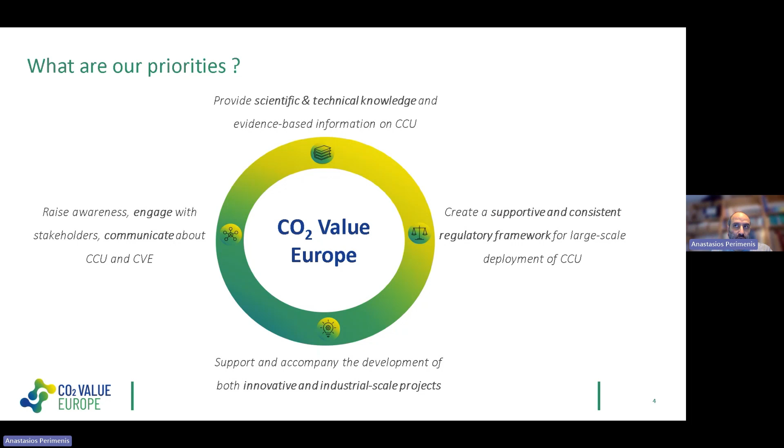Not everybody knows what CCU is, and there are also a lot of misconceptions about CCU, CCS, CCUS, CDR. All those terms sometimes are being used in a confusing manner. So we communicate about the subject, about us, about what our members are doing on that, so that we can raise awareness about the subject and its merits.

So what is CCU? I won't go into much detail on that, but basically it's a circular process where carbon dioxide is captured and this carbon can be used in a product. We follow the definition of the IPCC, and this conversion can take place under many technologies. It could be thermochemical, electrochemical, biological, and you have a wide spectrum of products that can be produced from those technologies. And at the end of life, the CO2 will either be permanently bound, or it will come out again and it can be captured and continue this circle again.

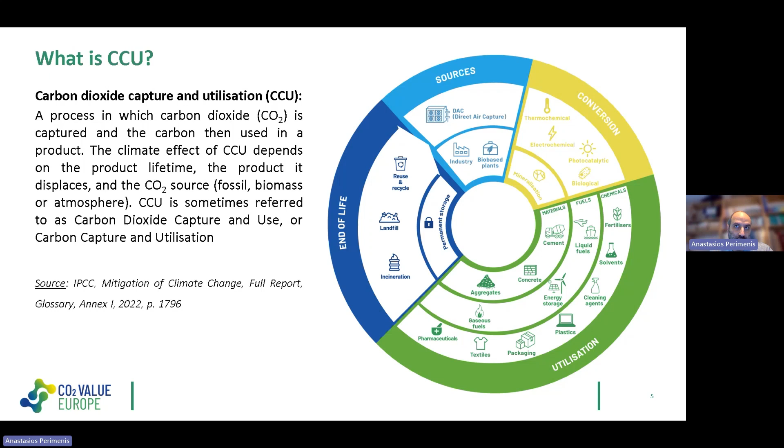So the basic reasons why CCU is important, among others, but importantly, these are arrays of processes that can lead to emission reductions, that can lead to net zero processes and pathways, and can even lead to carbon removal, so negative emissions. And that depends on what kind of product you will use and where your CO2 is coming from.

Importantly, and something that is often neglected in the discussion, is that CCU is not only a climate mitigation option. It's not only there to treat emissions, but it's also there to bring an alternative carbon feedstock into the production system. We don't have a lot of possibilities to substitute fossil carbon. There's biomass with its physical constraints. You can recycle a lot, chemical and mechanical recycling. And then you have CO2, which is a scalable alternative carbon source. And that brings more circularity into the production system.

If I can give an example, focusing on the fuel part, you would have an initial CO2 emitter, let's say a cement factory, and that would emit CO2, and then you would have your transport sector that will also consume fossil resources and would also emit CO2. If you want to claim emission reductions, then you can take the CO2 from the cement factory, for example, convert it into a fuel, and thereby substitute fossil fuel for the transport sector. And by this substitution, you can claim emission reductions.

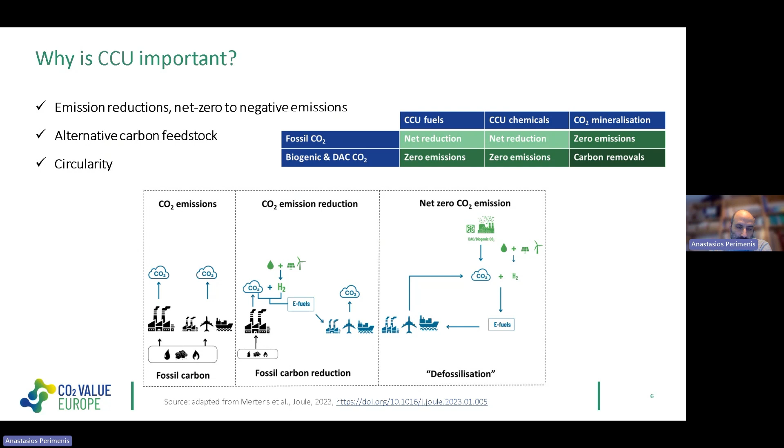And if you keep on recapturing this CO2 after its emission and bringing it back into the system, reproducing CCU fuels, or e-fuels as we call them, and use them in a continuous loop, then you are leading to net zero pathways. Or if you are taking this CO2 from the atmosphere, from the air, or from biogenic CO2, and you produce e-fuel, then you're also contributing to net zero pathways. So these are some examples of the importance of CCU.

And recently, in February last year, we tried to quantify this contribution of CCU towards climate neutrality, towards net zero by 2050, and to answer some questions like how much CO2 are we going to need to capture, how much of it will go to use, how much will go to storage, which economic sectors will see most of the reductions, how much electricity will we need to do that, where is the CO2 coming from. All these are in the report that we published last year. If I did my work correctly, then the barcode should function normally.

But the main message from this report, and here it's a simplified illustration so that it is more visible, is that looking at the graph from left to right, the blue column is the emissions of 2019 as a reference point, and under stated policies, we would be able to reduce 1/3 of those emissions by 2050. That's the second column, which means that we need around 2/3 of further effort. And we modeled this further effort, and we developed scenarios of this further effort where CCU is a part.

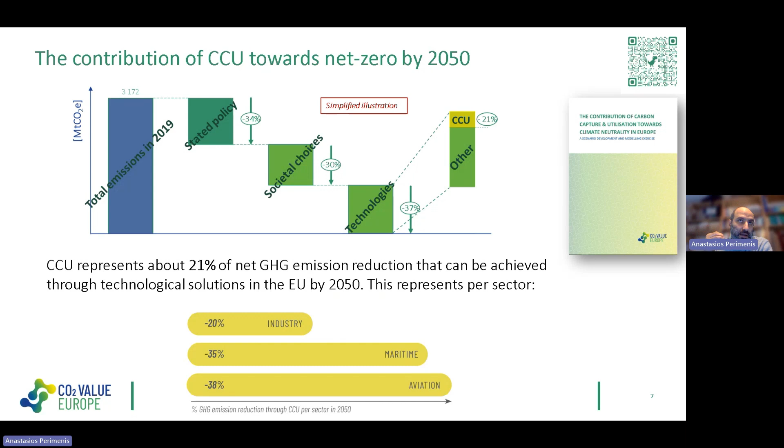And we saw that another 1/3 of what we need would come from societal choices that we have to make as a society overall to reach climate neutrality. And the last 1/3 would come from technological choices, from the technological effort that can take place. And of that technological effort, CCU would correspond to 20%. So overall, around 8% of the emission reductions that we need until climate neutrality would come from CCU by 2050.

And this is something that is happening already. So it's not something of the future. Here we see a list from our database, a list of projects that are expected to become operational by 2030. So in 5 years' time, in different areas, and the list is not exhaustive, but in different areas at different capacities for different products.

And that shows that there is a momentum of creating projects at industrial scale. And we need to foster and to keep this momentum going, because these products will substitute the conventional fossil-related products and will bring more circularity into our production systems.

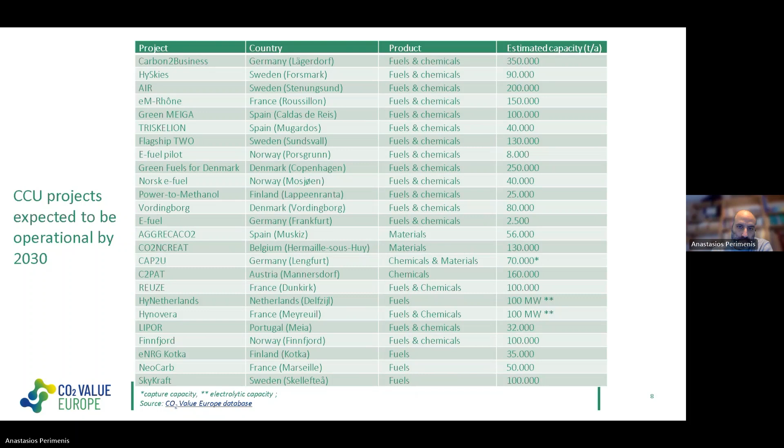And to make these projects happen, like every other innovative clean tech solution, it needs support. It needs funding and financing support. Here I'm showing 2 examples where CCU is relevant and has been supported. The Innovation Fund, which is probably the largest clean tech fund, also globally, I would say, with around 40 billion euros financed from the emission trading scheme until 2030.

And so far, at least 14 projects with a CCU element were supported during the first 3 calls. And this is an instrument that is evolving. It includes different scales. It started with large and small scale. Now it also has a medium scale. It supports different financing instruments like the hydrogen auction for the last call, and this one, the one of this year.

It has sector-specific support, for example, for the marine industry. So CCU is eligible, and we encourage our members and our stakeholders to profit from this. We also have Horizon Europe, the successor of Horizon 2020, which is the main R&D framework program from the Commission.

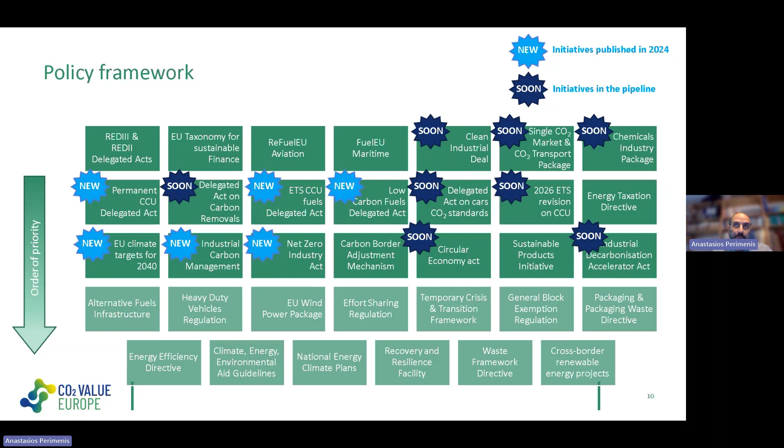So all of those instruments are relevant. Some are more generic about industrial carbon overall, and some are more topical about a specific sector, aviation, maritime. In the next slide, we can see a couple of examples. This is with the view of you having this presentation, and you can look at it at your ease afterwards.

But if you look at the ETS, the emission trading scheme revision, where basically with the ETS you have to pay for allowances to be able to emit, it has been recently recognized with the revision of the ETS that when you bind this CO2 in a permanent way into a product through mineralization, for example, you don't have to surrender your allowances because the CO2 is not coming into the atmosphere again.

As we speak, there is a discussion of how you can incorporate those uses and applications of CCU that are not of permanent binding, like fuels or chemicals, where the CO2 is eventually, at the end of life, coming out again, but it has substituted a fossil conventional counter product. And this is a discussion that is happening now.

If you look at ReFuelEU Aviation, the third in the list, for example, there you have quotas for sustainable aviation fuels. And by quotas, we mean that the fuel supplier and the airlines are obliged to use X% of sustainable aviation fuel. And there is a subcategory for synthetic aviation fuel, which is basically CCU fuels.

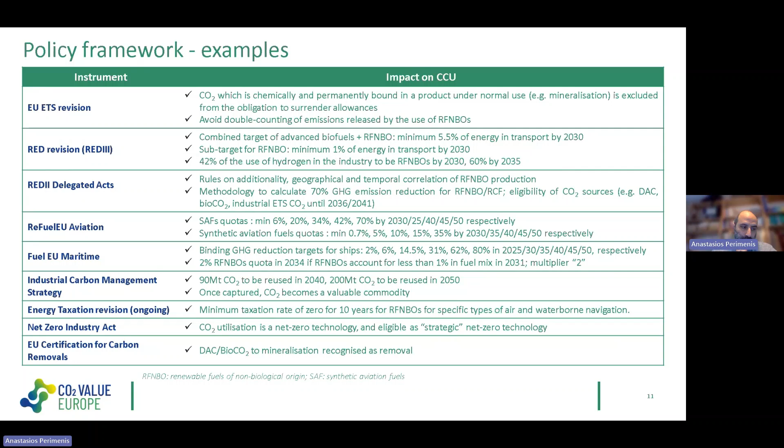To sum it up, because I think I have a couple of minutes left. What we have calculated with our work that I mentioned before, and it's not very far from what the Commission says in its impact assessment for the 2040 targets and in the Industrial Carbon Management Strategy, is that CCU can represent around 45% of the carbon that we will need to capture in Europe. That will be around 450 megatons. And that can be used for the production of fuels, chemicals, and materials to defossilize various economic sectors in Europe.

We have several projects, as we have shown, that are able to become operational, but they need a policy framework that is consistent, that is pragmatic, so considerate of the industrial realities, and, especially at the beginning, not overly strict on how you can access your renewable electricity or what kind of CO2 you will be able to use and until when. So that is very important for projects that are ongoing now, and we have also seen some projects being stopped because of these regulatory framework difficulties.

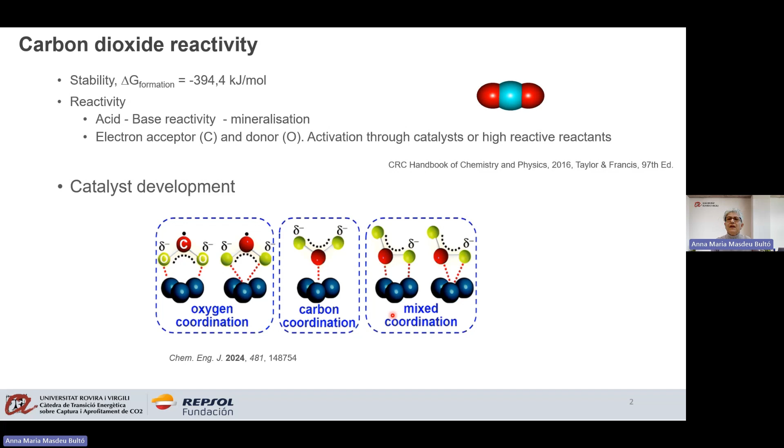Then the catalyst development at this point is crucial for CO2 transformation. And the capture technologies implemented so far are mostly related to the acid-base character, in this acid-base reaction, mostly with alkanolamines. But this process has some drawbacks due to the need of energy to separate the CO2.

Then, among other issues, new processes to avoid the issues have to be developed, and the use of porous adsorbents for physical and chemical adsorption is one of these possibilities, and materials such as zeolites, porous carbon, and more recently metal organic frameworks have shown high CO2 adsorption capacity.

MOFs are metal-containing porous polymers consisting of metal coordinated to ligands, which are interconnected between them to form one, two or three dimensional structures leaving pores where CO2 can be adsorbed. These materials are not only applied to capture, but since they may contain active metal centers, which is the case of this magnesium example here, they are also explored in connected capture and reactivity technologies, the so-called reactive carbon capture.

But the transformation to carbonate-based materials can be a way to reuse CO2, not only to get rid of it, but to prepare useful materials such as aggregate for building materials. And when CO2 comes from direct air capture, for example, it could contribute to negative emissions. A joint project of Repsol, Petronor, and Ausio has developed this construction and will be presented by Peter Guni.

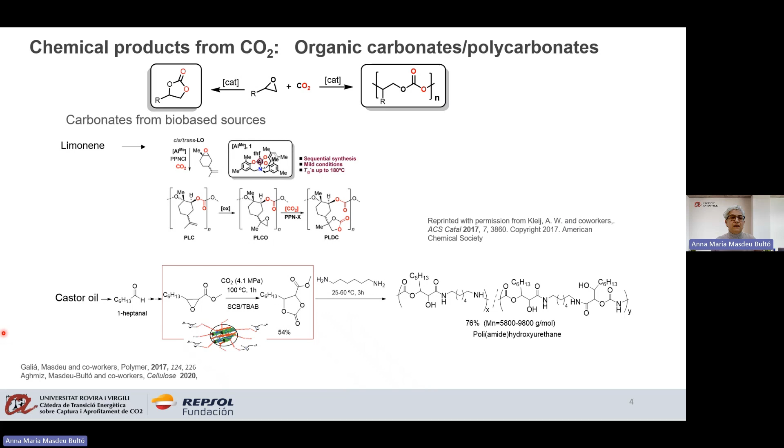developed in our group in collaboration with Professor Galia from our university and Professor Aghmiz from Tetuan University. In this case, a derivative from castor oil was transformed to an oxide, and using a catalyst obtained from vegetal waste, it was transformed by reaction with CO2 into a cyclic carbonate. It reacted readily with a diamine to form this polyurethane that can be used as a polymer. So these are a couple of examples of alternatives that are being developed.

And regarding other products such as methanol, methane, fuels, or carbon monoxide, they can be obtained from reduction of CO2 using hydrogen, and they can be used as fuels directly. Methanol or methane have the advantage that the emissions of CO2 are less important, but they can also be used as chemical intermediates for products. For example, the production of methanol by the ICI process is an established process using aluminium, zinc, and copper-based catalysts.

And now in this area, the research is focusing on the use of multifunctional catalysts that can transform CO2 to fuels directly with the same catalyst. And another important aspect is the transformation of CO2 to what they call e-fuels. For that, the first reaction is to convert CO2 by reaction with hydrogen to CO, a mixture of CO and hydrogen, syngas, and then by the Fischer-Tropsch reaction, this syngas can be converted to e-fuels, and this topic will be presented by Diana Cano.

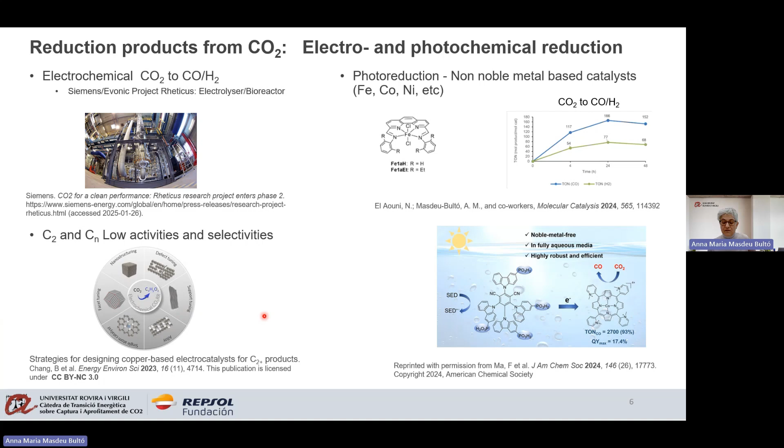And the strategies are important, the strategies of tuning the design of the catalyst. For example, they have been using nanostructures. They have been tuning the defects of this structure, or the support is important. They have been using alloys with different metals to promote the reduction and the coupling, and also single atom catalysts. So as a conclusion, there are multiple scientific and technological challenges to be faced to develop the potential of CO2 transformation.

And just a last idea, there is no research without the support of society that allows or fosters the investment coming from public or private resources. So the chair is very much involved in dissemination of the decarbonization subject through local media and participating in side events. And also, in that sense, the University Rovira i Virgili is organizing a Master on Industrial Society Decarbonization Management. We will hopefully start next academic year and it will cover the multidisciplinary complexity of decarbonization.

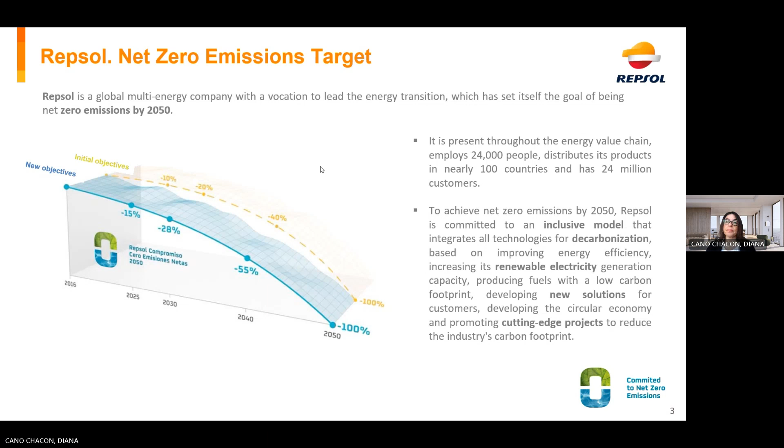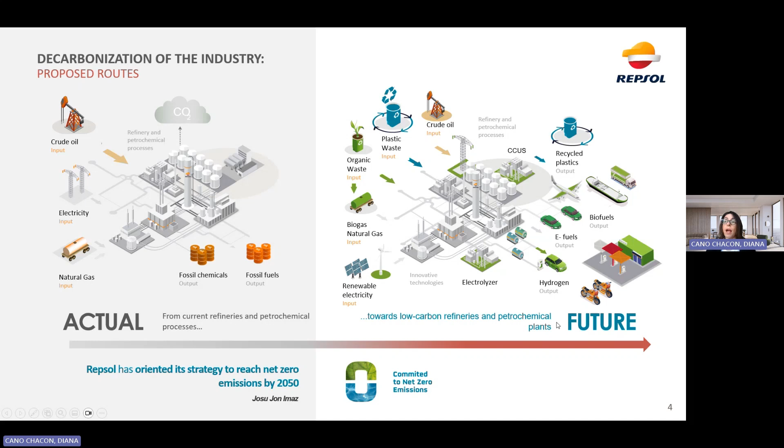Repsol is a global multi-energy Spanish company with a vocation in the energy transition. Repsol was the first company in the industry to announce its net zero emissions by 2050. But how? Repsol defends technological neutrality. To achieve this goal, we adapt the current model of refineries and petrochemical processes to low carbon plants. Replace the use of conventional crude oil, electricity, natural gas, with renewable resources, waste and biogas. Conventional products like fuels and chemicals will be replaced by renewable products like recycled plastics, hydrogen, and renewable fuels, both biofuels and synthetic.

Okay, then let's start to explain what e-fuels are and the role that they will play in the decarbonization of transport. E-fuel is a term used to describe synthetic hydrocarbons resulting from the combination of renewable hydrogen and CO2 coming from a concentrated source or directly from the air. E-fuels are also named RFNBO, renewable fuels of non-biological origin. You can also name them power to liquid, synthetic blending components, etc.

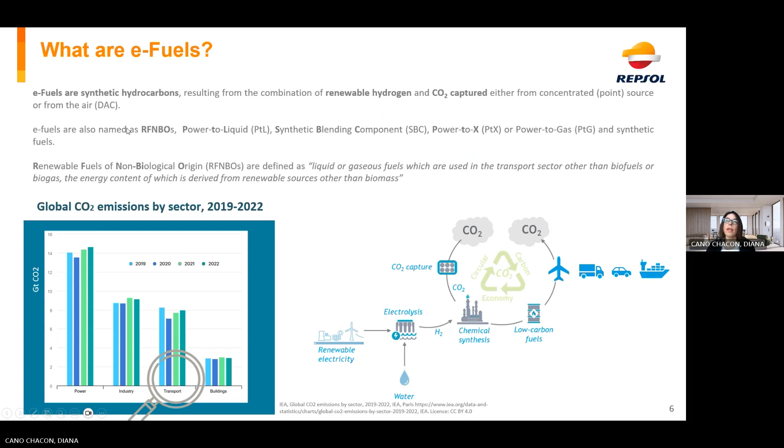Let's go into the detail of the production pathways. E-fuel production starts with the renewable hydrogen production. This is done by an electrolysis process that breaks down water into its components, hydrogen and oxygen. Renewable electricity is required. The second feedstock needed is CO2, captured either directly from the air or from an industrial source, which can be biogenic or fossil.

The regulation establishes that non-sustainable CO2 will be banned from 2041. Basically, that means that in the future they will have to be produced from biogenic CO2, and this is an important challenge. In the first process step, the hydrogen is combined with CO2 under pressure and temperature using catalysts, either directly through the methanol route or with syngas through the Fischer-Tropsch pathway.

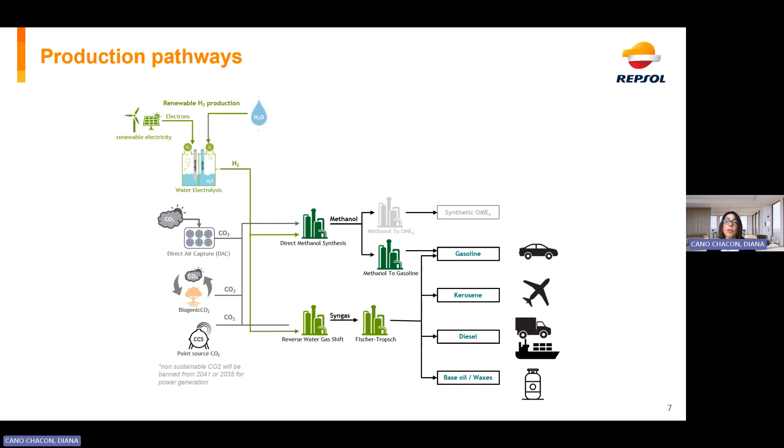In the methanol route, a second step is needed to transform the methanol, the alcohol, into paraffins in different steps to produce the final products, e-gasoline and e-kerosene. In the other route, the Fischer-Tropsch route, the hydrogen reacts with CO2 and forms the syngas, carbon monoxide and hydrogen, and then it reacts in the Fischer-Tropsch, a well-known catalytic process in which the syngas is converted into liquid hydrocarbons or synthetic crude. This synthetic crude is upgraded until the final product.

The context: how is the regulation in Europe? E-fuels are not specifically defined by regulation, but they are included in the RFNBO definition. The European Commission is reviewing to recognize light-duty vehicles that are fueled exclusively with e-fuels. Heavy-duty regulation is under discussion and will be impacted by the light-duty vehicles regulation.

Along the Fit for 55 package, there are specific mandates for e-fuels, for RFNBOs, in all transport modes. We have different targets in ReFuelEU Aviation, in FuelEU Maritime, and also in the Renewable Energy Directive, RED 3, for all transport modes. So clarity in regulation is very important in order to be able to carry out investments for the private and public sector.

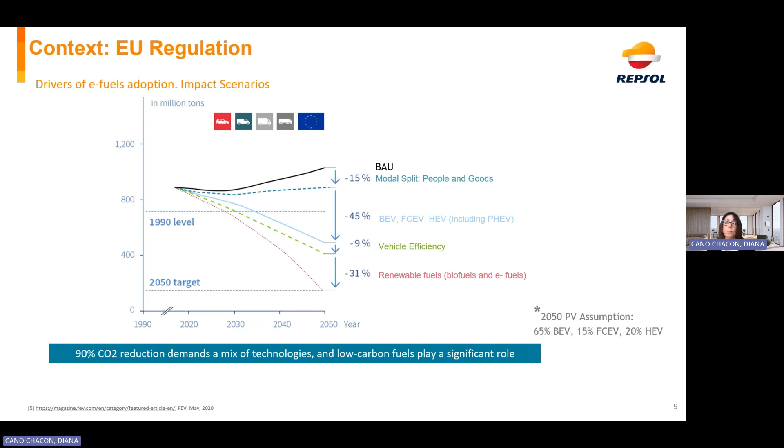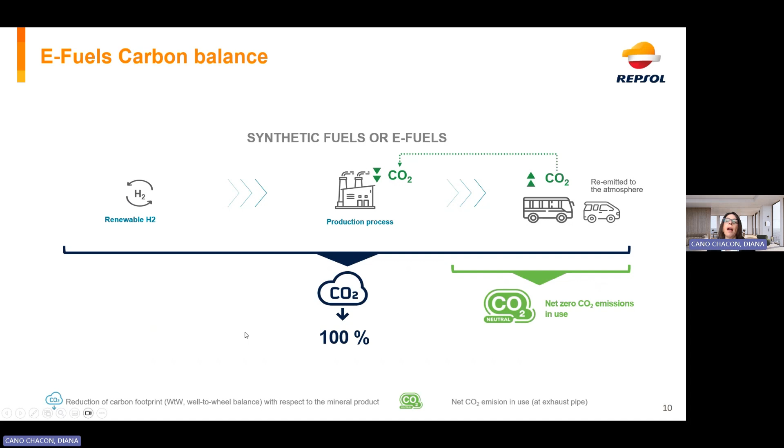If we talk about the carbon balance in e-fuels, we see here that in the production process, the CO2 that is captured to produce the e-fuel is equivalent to the one that is emitted to the atmosphere. That is what we call net zero CO2 emissions in use. We are talking about the exhaust. If we talk about the well-to-wheel balance compared to fossil, conventional fuels, we have a very important CO2 footprint reduction with e-fuels.

Then, to summarize, why e-fuels? Because they are net zero emissions, because they are compatible with existing infrastructure and fleet. They are a solution for a wide range of sectors: aviation, road, and marine. They are practically unlimited, because we have available CO2, renewable electricity, and water, which are the raw materials. They are an alternative for non-fuel products like lubricants, chemical industry, or waxes, and they are a renewable energy vector.

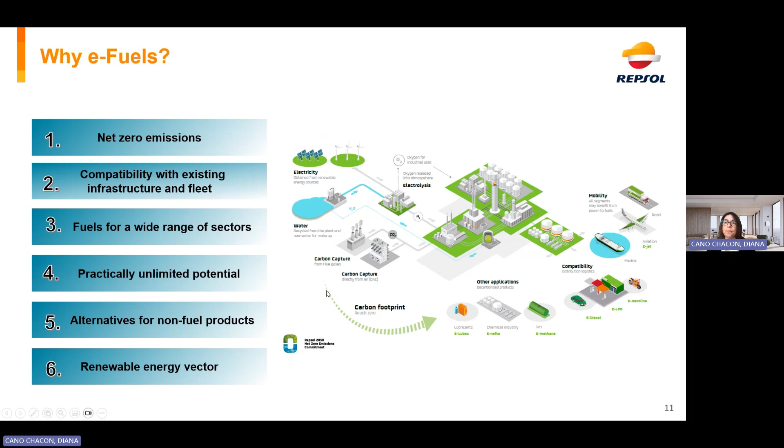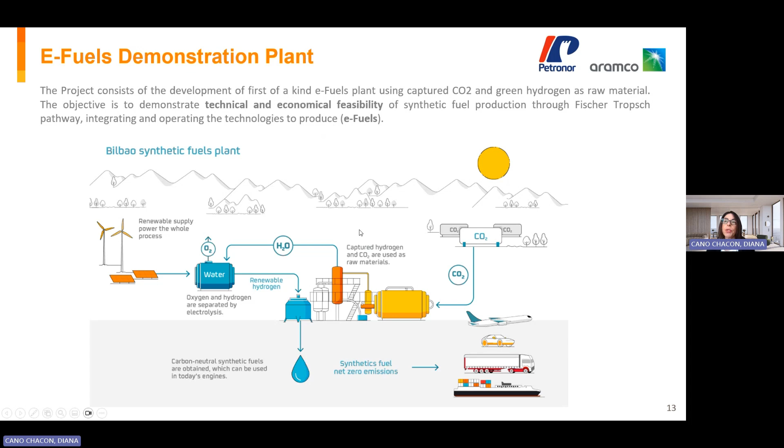Let's go into the explanation of the project that Repsol is currently developing. The project consists of a first-of-a-kind demonstration plant that will use captured CO2 and renewable hydrogen as raw material. The objective is to demonstrate the technical and economic feasibility of synthetic fuel production through the Fischer-Tropsch pathway, integrating and operating the technologies that we are going to use to produce the e-fuels.

If we go into the project details, the demonstration plant will be located in Bilbao. The startup is during 2026. The production capacity is around 2,000 tons per year of e-fuels. The CO2 avoidance is around 7,000 tons per year. The demonstration plant will use green hydrogen from a 10 megawatt electrolyzer located in the same place. The objective, as I explained before, is to demonstrate the technical and economic feasibility of e-fuels production through Fischer-Tropsch. Some key insights of the project.

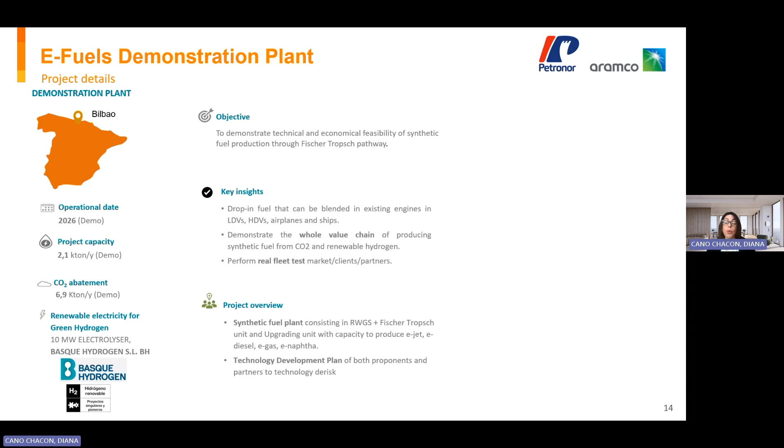We will produce drop-in fuels that can be blended in existing engines. We will demonstrate the whole value chain of producing synthetic fuels, and we will perform real fleet tests in market with clients and partners. So the project consists of a demo plant composed of 3 different units: reverse water gas shift to produce the syngas, the Fischer-Tropsch process to produce the synthetic crude, and finally the upgrading unit that will produce the final products: e-naphtha, e-kerosene, and e-diesel.

We have a technological plan to de-risk the technology. About the partnerships for e-fuels production: the partners, the investors, are Saudi Aramco and Repsol, 50% each. Petronor is an important part of the project as it provides integration with the refinery that is very close to the demonstration plant. We have 2 technology partners, Johnson Matthey and Axens.

And last but not least, we have a partnership with Basque Hydrogen, that is the company that has been created to build the 10 megawatt electrolyzer. And the shareholders are Alba, that is an affiliate of Repsol Petronor, Enagas Renovable, and the Basque Energy Agency.

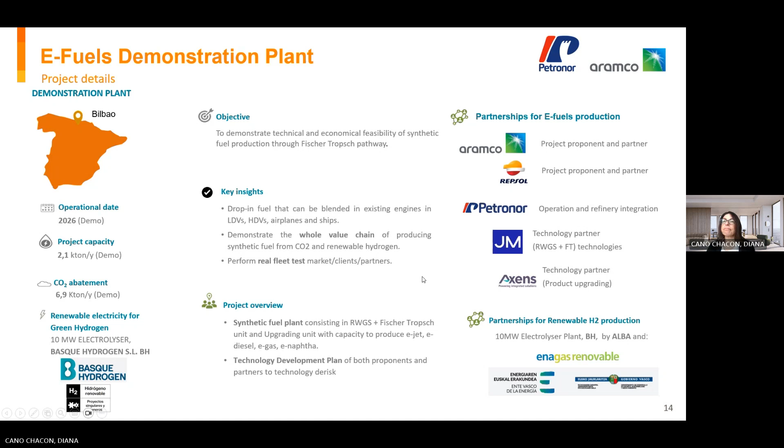The CO2 is currently captured in an industrial plant in the refinery. We have future plans to replace this CO2 with DAC, with CO2 captured from the air. And the hydrogen from the demo will be connected with the refinery with a reversible line that can provide hydrogen to the demo in the case of any electrolyzer failure.

The next step will be the scaling up of e-fuel production. We need to face some challenges, and on the other hand, we have new opportunities. Regarding the challenges, we have business challenges. The first one, and very important, is that the cost and investment necessary for producing fuels is very high. Also, the regulatory framework is very demanding. We have an obligation of synthetic fuel in the transport sector. We have some restrictions for the CO2 source origin.

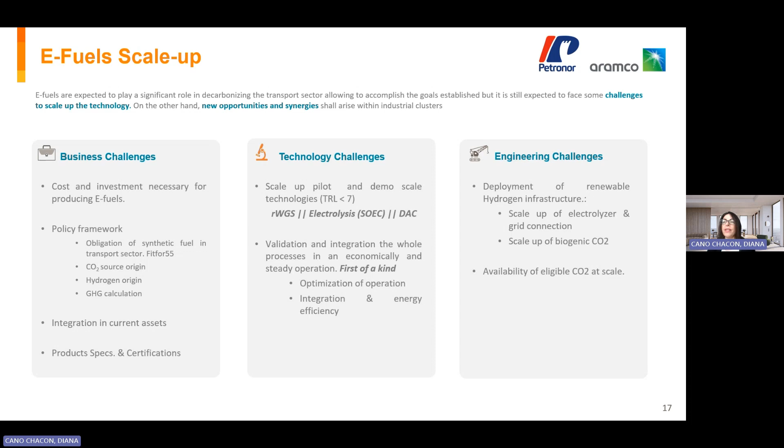For that, we need to validate and integrate the whole processes in an economical and steady operation. We need to optimize the operation, and we need to improve the energy efficiency of the project. The engineering challenges are regarding the hydrogen infrastructure. We need to scale up the electrolyzer and the grid connection, and we need to cope with the availability of eligible CO2 at scale.

Finally, the direct opportunities that we are facing: the ReFuelEU Aviation legislation sets a minimum synthetic fuel share in kerosene blended fuel from 2030 up to 2050. This is a clear mandate that increases over time. It's an opportunity. Also, this production pathway produces high quality streams with a high energy density, and it increases the flexibility for final products.

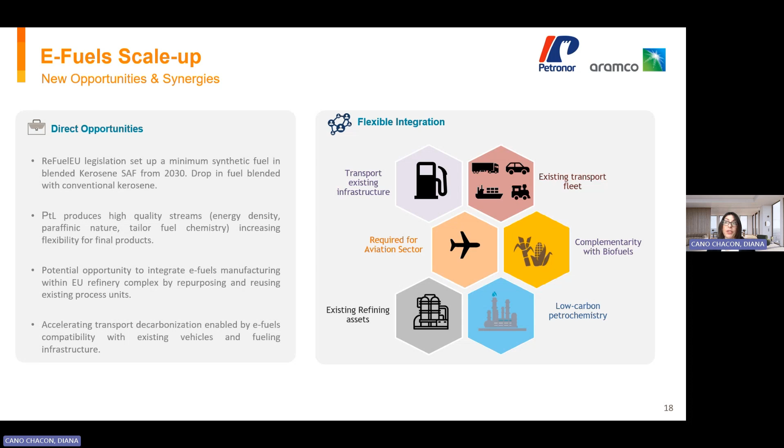We have a potential opportunity to integrate this new process in a refinery by reusing or retrofitting existing process units. We can accelerate transport decarbonization because e-fuels are fully compatible with existing vehicles and fueling infrastructure. So to summarize, if we want to achieve net zero emissions in the future, we need to combine different technologies.

Synthetic fuels are renewable fuels that will play an important role in sectors that are difficult to electrify, like aviation and maritime. They also have the advantage of being able to accelerate transport decarbonization because they are fully compatible with existing infrastructure. The challenge ahead is technology development with funding, financial, institutional, and social support to reduce the costs of this pathway. Thank you very much.

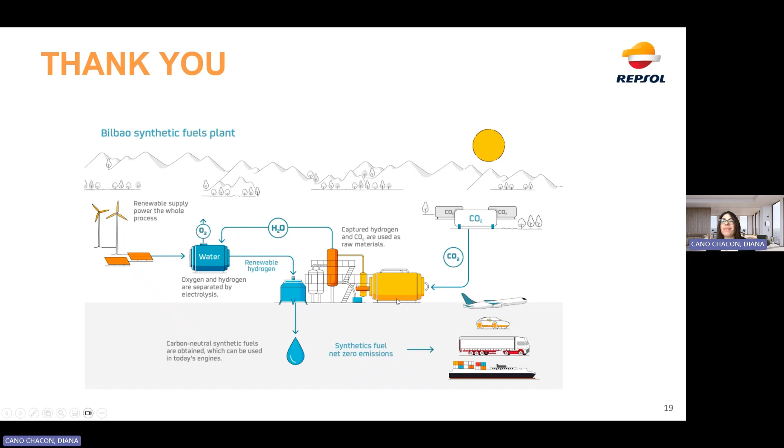Thank you, Diana Cano, for sharing with us this project of Repsol. Now, let's go. We are about 6 minutes delayed.

So now let's move towards the next speaker, Francisco Pelayo Garcia. He is a professor and group leader at the Institute of Photonic Sciences in Barcelona. His research spans the design and engineering of materials and systems for applications in clean energy, and focuses on developing scalable and sustainable technologies to produce chemicals, including green hydrogen and hydrocarbons from carbon dioxide capture and conversion. Please, Francisco Pelayo, the floor is yours.

Thank you, Anna. Let me share my screen. And well, thank you.

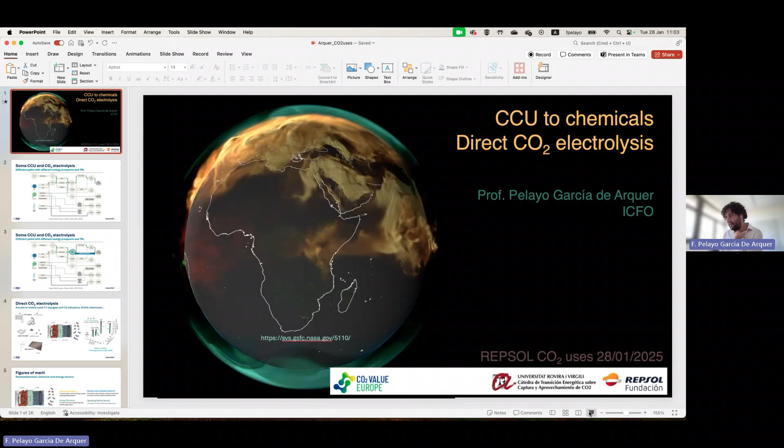Well, again, for the introduction. I'll try to be brief so we cut down the 6-minute losses in time that we accumulate. Okay, so I don't know if you can see the screen. I like normally to start with this brief animation.

I don't have time to explain in detail, but I think this is a beautiful animation from NASA showing biogenic sources of CO2 in green and anthropogenic sources of CO2 in orange-brown. And you could look into this here in more detail. But today I'll try to summarize and explain, first, in more detail what CO2 direct electrolysis is and how this falls within the overall portfolio of technologies for carbon capture and utilization.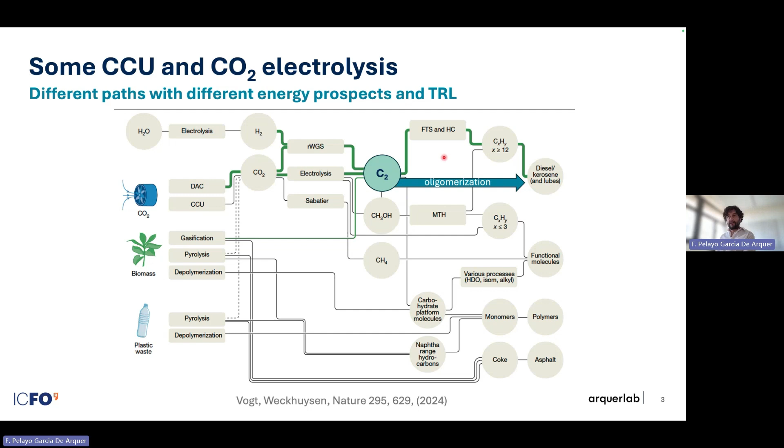So I explain a bit more now about the core of this technology. In direct CO2 electrolysis, you need a carbon source. This could be from the atmosphere, like DAC, or from single point emitters, like steel factories or cement factories. You need water, of course, and you also need electricity. And one of the appeals of this technology is that, as opposed to Fischer-Tropsch and others, this can be directly operated with electricity, so it doesn't need high temperatures or pressure. So it can be coupled with renewables in a convenient way.

So you have a cathode, and the idea is that you have to break down the CO2 molecules into fragments, normally CO fragments first, and you also have to break down the water into smaller fragments, like OH groups, and you need to couple these on top of the cathode catalyst electrode. You also have an anode to close the reaction, where you normally oxidize water, and a membrane that separates these processes. In doing so, you have access to a wide range of small carbon-based molecules.

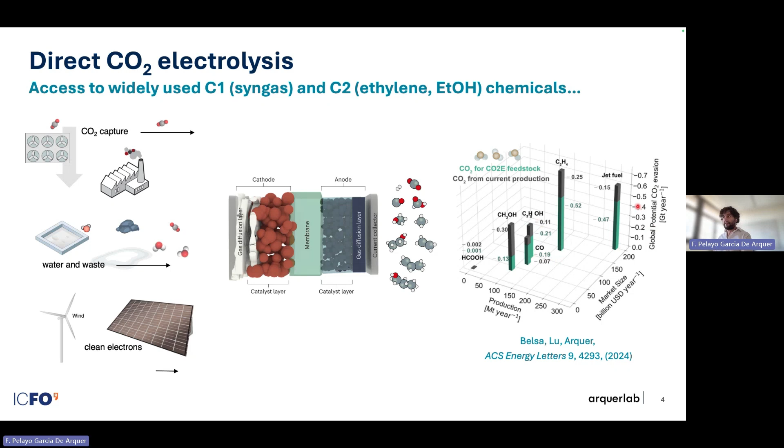So you can see here already ethylene as a very important chemical with large markets, large production, but also large avoidance potential, ethanol, methanol, of course, CO and syngas, and eventually jet fuels as one of the largest markets for fuels. Now, my idea is to show a bit of the state of the art and where we are now compared to where we were 10 years ago.

To do that, I'd like to introduce some figures of merit. The viability of this technology relies on getting some key performance indicators into the right place. One important metric is the selectivity. You can make many different molecules, so it's important to be selective to the molecule that you like. In electrochemistry, this is often referred to as Faradaic efficiency: how many of the electrons that you use go to the desired target reaction.

From this, it's important then to consider the rates. How much product are you generating per unit of time? So this can be approximated by the partial current density. So it's the current density that you put into the system multiplied by the Faraday efficiency. So that tells you how much product you produce per time.

Then you have energy efficiency. So you need to input some voltage here, and then you get a product that has some energy. So there is an energy efficiency of this process, as well as what is the operating lifetime. So these systems are not yet as stable as we would like them to be. So how many hours these systems can be reliable.

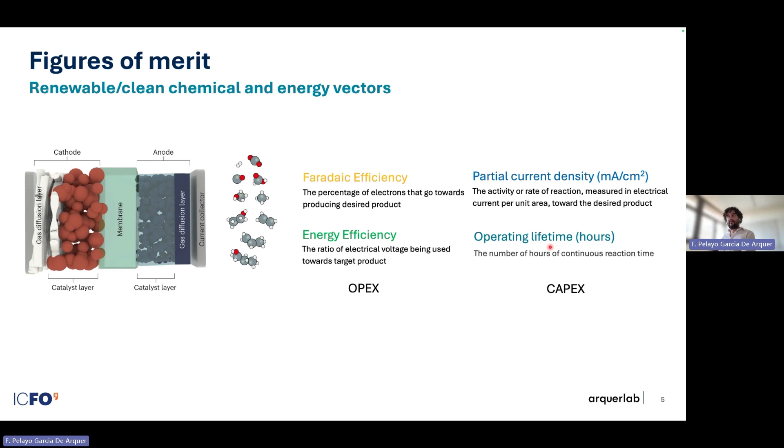So these metrics are connected to important techno-economic aspects such as OPEX and CAPEX costs. Mostly Faraday efficiency and energy efficiency relates to the OPEX. So how efficiently are you using your electrons? And this is very important because a large fraction of the cost comes from the use of energy. And CAPEX refers to what's your investment and how soon you can overcome the initial investment. So you need high currents and long operating lifetimes.

So now this is a bit difficult because there are many possible reaction pathways. So to enable this, you have first to get the CO2 absorbed and activated, and then CO2 has to break into different molecules, as we mentioned. This is highly simplified, but you have CO from CO2, and then CO has to couple to each other, and then you can make C2 products. The reality is that this is more complicated and not even fully understood.

Why this is difficult too is because these different reaction pathways share similar thermodynamics. You see here the voltages versus the reversible hydrogen electrode of the different reactions. So within a few hundreds of millivolts, you have similar reactions. And also importantly, these reactions require a different number of protons and electrons to proceed. So to make complex molecules, you need lots of proton and electron transfer steps versus the hydrogen evolution reaction, which is your main competitor here. So you want to promote these reactions selectively as opposed to this competing reaction.

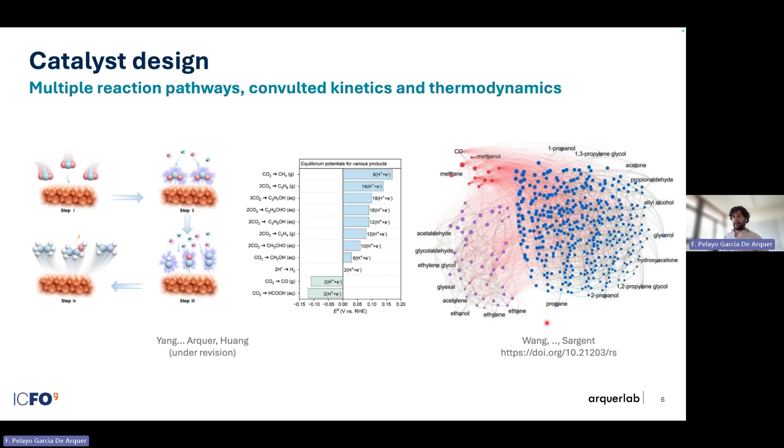And I also like to show this graph from one of my ex-colleagues, who shows using graph theory how convoluted the reaction pathways can be, starting even from CO, which is simpler, how different products are related through different reaction pathways. And you can learn more about these works here through these references.

So how have people tried to improve the selectivity of this process? So the first thing that we learned, actually, thanks to Hori, who was one of the pioneers in this technology of CO2 electrolysis in the 80s, is that depending on the metal catalyst that you use, you can have different selectivities. So there are metals that are very good to make hydrogen, metals that are very selective to make CO, others to formate, and others to make hydrocarbons. You can see here in this plot adapted from Hori's work how different metals promote formic acid or formate, others promote CO.

What's interesting here is that there is only one metal that can make hydrocarbons in an efficient way. So copper can make methane, ethylene, ethanol, lots of products. So it's difficult to get selectivity there. And thanks to the work of many smart people, especially the group of Norskov and others, now this can be understood and rationalized by how the electronic properties of your metals interact with the adsorbates. We have proxies to understand how we can tune selectivity based on this.

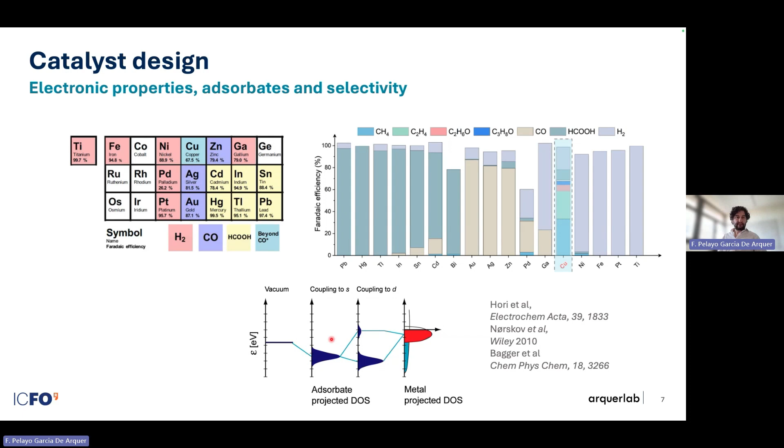Now, changing the material might not be efficient because you have many reaction intermediates. So what people also try to do is design more sophisticated catalysts, like alloying different metals, introducing defects, changing the structure of the metals and the catalysts, and overall changing materials from the atomic scale to the micro scale. And I'll show later how this can be useful. And also, recently, more and more, we're learning how important it is to tune the more macroscopic properties of these reaction interfaces, to tune mass transport and to control this through reactor and electrode engineering.

So lots of groups started working on this area more and more through that time. And I would like to summarize the Faraday efficiency, the partial current, the energy efficiency, and the lifetime back then. So back then, there were already very interesting initial papers showing that we could be kind of selective to ethylene, like around 40% selectivity. But one of the important points is that the current densities were very low. So they were very impractical to achieve viability.

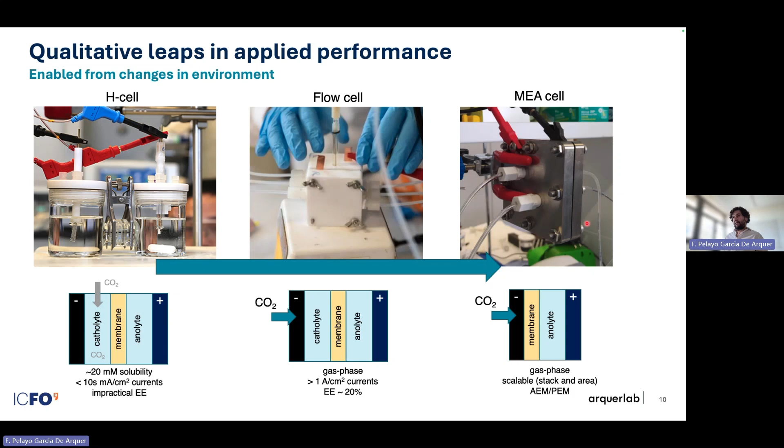So from the use of fundamental electrochemical cells, H cells, back in the 2010s, where the current densities were low, through the implementation of flow cells that enable higher currents and higher energy efficiencies, and eventually to the implementation of zero-gap membrane electrode assemblies, very similar to the kind of reactors that are used for AEM water electrolysis. So here you have a path to scalability as well and energy efficiency.

One challenge also related to the catalyst design is that when you design a catalyst, you hope you have the perfect material with the perfect atoms, perfect coordination, perfect valence. But sadly for us, it's not so straightforward, because when you put your electrode in the electrolyzer, in contact with electrolyte, and you apply a potential, very rapidly, in most cases, these electrodes and these catalysts change a lot. So not only do they change in morphology, they change in composition. You can see here some beautiful examples using 3D electron tomography, but there are many others.

And thanks to many groups, but especially in Europe, I like to highlight the work of Beatriz Roldan and Raffaella Buonsanti, who did lots of work and are still doing lots of work to understand these transformations. We can now have more clarity on what we mean when we design a catalyst. We actually are making a pre-catalyst that then transforms during operation. And it's important to consider this when we design these materials. It's difficult to design these electrodes, okay?

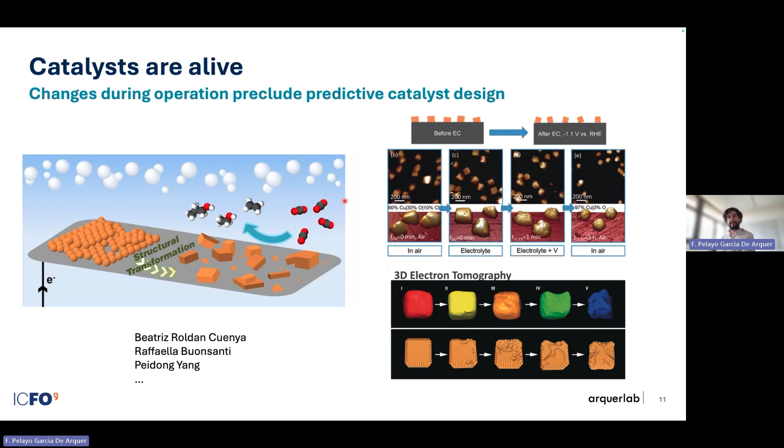Now, connected to this, I would also like to highlight progress from 2018 up to now that was achieved not through changes in the catalyst, but through changes in the reaction environment. So in all of these cases, you'll see the same electrode based on copper sputtered on a hydrophobic support, a gas diffusion electrode based on PTFE. Some works have achieved really important improvements. First, in selectivity at relevant reaction rates, here by enabling operation in alkaline environments, and we'll see later that this also had some side effects.

Then how, using further modifications of the environment, we could extend the selectivities to much higher current densities, comparable in some cases even with proton exchange membrane water electrolysis. And this was achieved through the coating of catalysts with a particular type of polymer, Nafion, that allowed for the extended availability of CO2 over the surface. And how more recently, using similar approaches, we could contribute to solving one of the problems in the field of CO2 electrolysis, which is the very limited carbon utilization. And we will learn more about that in a bit.

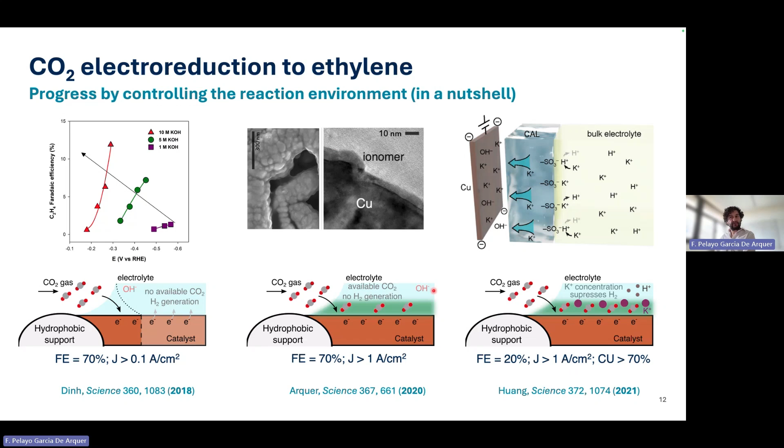Okay, but the summary here is that designing fancy catalysts is important, but the reaction environment is also very important. And now, thanks to progress across the world in many groups, we are in a much better position where we have seen advances in selectivity reaching up to 80%, current densities that are very promising, even above the ampere per square centimeter scale. Energy efficiency jumped from sub-optimal values to 20%. It is still far from targets and still far from competing with sister benchmark technologies such as water electrolysis, but this is a good advance. And some progress also in stability, okay? And this is exciting, but this also reminds us that there are challenges ahead.

I also like to highlight that some of these technologies are trying to be commercialized. So I like to highlight one example that started at the University of Toronto in the Carbon XPRIZE contest in 2017, where there was a challenge to scale up the technology, to demonstrate a technology that could capture and convert 1 ton of CO2 per day.

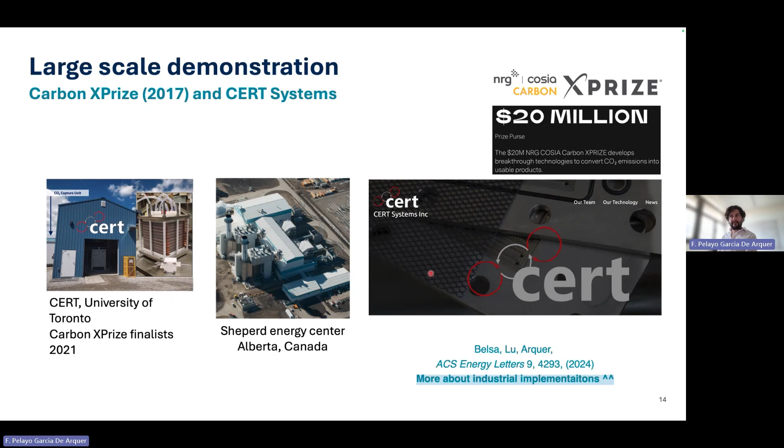So this is based on CO2 electrolysis, and this resulted in the creation of a startup, CERT Systems. You can learn more about this and other commercial endeavors in this paper that I don't have time to comment on. But this was a very, very beautiful scale-up experiment, and actually coupled to a power plant in Alberta, in Canada. That was very fun.

So now, one of the challenges, since I'm running bad on time. So yes, quickly, I presented some promising landscape for performance, but then there are also some very important challenges. So the use of alkaline environments and the fact that during water electrolysis and during CO2 electrolysis, you are also creating locally OH groups. So you are always creating hydroxyls here. This promotes the conversion. I mean, it's the same approach that is used for CO2 capture that Anna mentioned before. So this converts CO2 into carbonates. Okay, this is a downhill reaction, and this means that most of the CO2 that you put in the system is actually converted into carbonates.

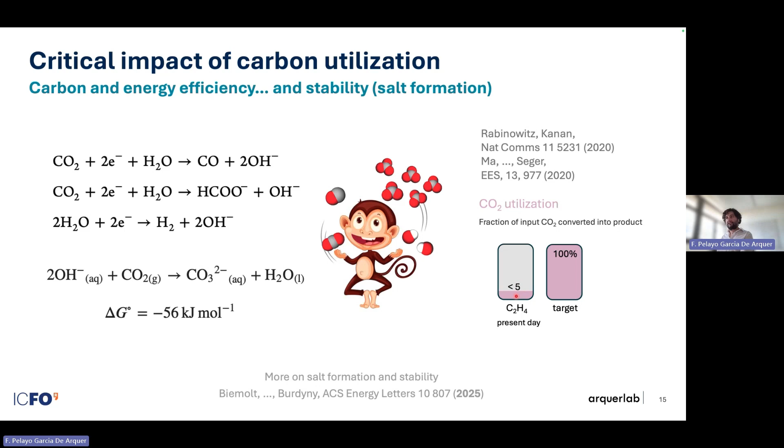Only 5% back in the day was converted into the molecules of interest, and this has profound implications when it comes to the process. Okay, you can see here now, combining all of the metrics, where we were and what the target is. Importantly, too, I mentioned that some progress was made in individual performance metrics, but what often happens is that when you improve one metric, the other goes down. So we need progress not in individual metrics, but a holistic approach simultaneously in many different performance metrics.

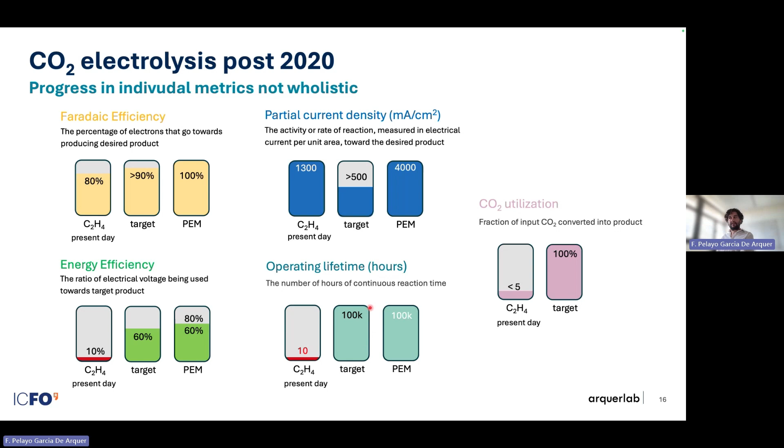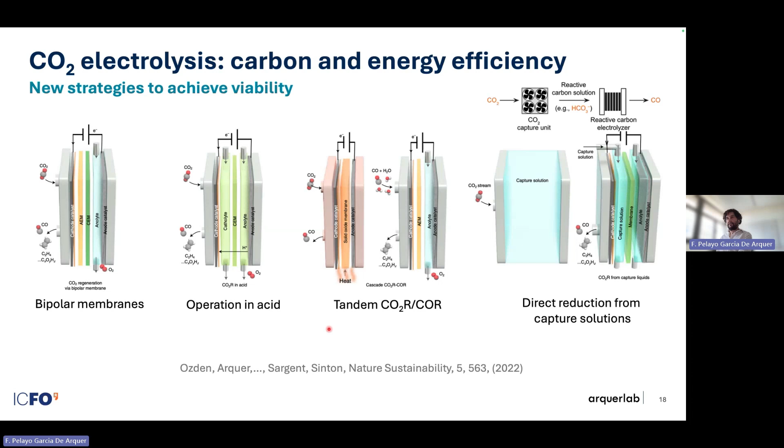To overcome this, there are different strategies that have been proposed. So the use of bipolar membranes, operation in acid, and tandem electrolysis, among others. You can learn more about this in this paper published a few years ago. So, just to summarize this paper, I showed it in a previous slide, but in this paper, just by controlling the reaction environment, we were able to demonstrate operation in acid media, increasing carbon utilization with moderate Faraday efficiencies, but showing that there is also a path to achieving higher carbon utilization in the field.

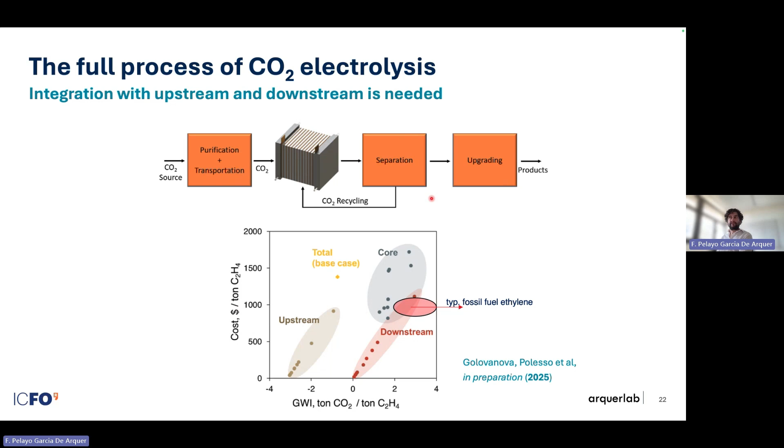So only when you combine all of these in the right way, you have prospects of achieving ethylene, in this case more expensive than typical fossil fuel ethylene. That's obviously the case, but that has some prospects for carbon negativity or carbon zero. So it is challenging to consider all the carbon emissions through this process and to see when the process is viable.

So just to close, to summarize, this is what I believe is important to think about in the future of CO2 electrolysis. So we need more work on membranes and integration. We also need not to forget the coupled reaction at the anode. So we need tailored anodes, and other reactions in some cases could offer a path to higher energy efficiencies. Also new reactor concepts; as I've shown, most of the biggest leaps in performance came hand in hand with different device concepts. And also demonstrate integration and scale, because until we scale things up, we don't know what will go wrong. Also, these processes should be scalable, ideally not relying on critical raw materials or forever chemicals such as fluorinated compounds.

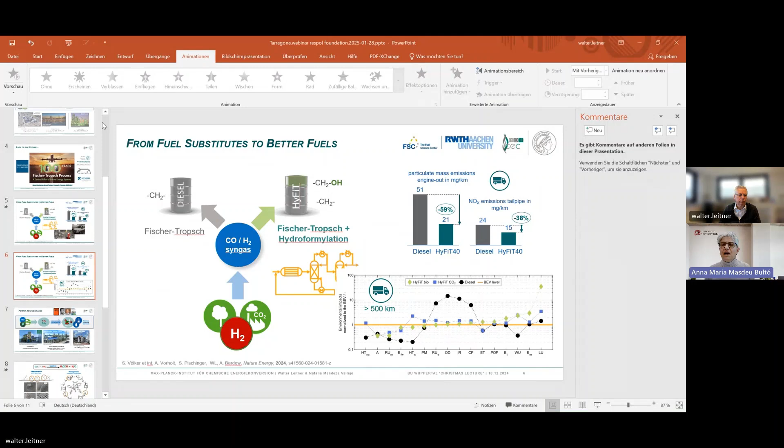Walter Leitner is director at the Max Planck Institute for Chemical Energy Conversion in Mülheim an der Ruhr, and holds the chair of chemical technology and petrochemistry in Aachen University, Germany. Walter Leitner has been active in the field of catalytic conversion of carbon dioxide since the early 90s, and he's recognized as a leading scientist in the field. The research efforts of his team have been recognized with several distinctions, including nomination among the top 3 innovations of the German Presidential Future Award in 2019 and the European Inventor Award in 2020 for an academic industrial collaboration to use CO2 as a raw material for polymer production.

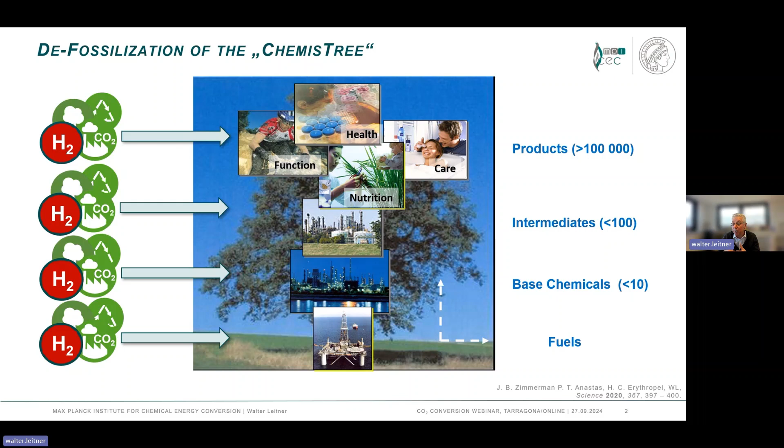But we know that CO2 is not our only challenge. The production of chemicals in many ways exceeds planetary boundaries, not only on CO2, but also on other aspects. So what we also should consider is that we funnel these feedstocks in at several stages of this value chain to not only substitute the same products, processes and process schemes, but that we use innovation to bring up better synthetic pathways, better processes, and maybe even better products that deliver better function than today to move into a sustainable future, not just by substituting, but by improving.

And I would like to just highlight two of the important factors here. One is on the fuels, and many previous speakers have mentioned the Fischer-Tropsch process. And I'm actually very happy because I'm sitting here in my office at the very place where the Fischer-Tropsch process was discovered 100 years ago. In May this year, we will celebrate the 100 years anniversary of the Fischer-Tropsch process here in Mülheim an der Ruhr in Germany, where it was discovered by Franz Fischer and Hans Tropsch. And I actually have here some original Fischer-Tropsch samples made by these two gentlemen about 100 years ago.

So what's new? What can we do beyond the traditional Fischer-Tropsch process, which arguably is incredibly important, in particular for aviation fuels and for fuels in general? But maybe we can improve it. The Fischer-Tropsch process is aiming at hydrocarbons as diesel or kerosene replacement. And in particular for kerosene, there's nothing else than hydrocarbons that we can see in the foreseeable future. But for other applications, the molecular composition of the product could actually be an open design parameter, because as we change the feedstocks, we may also envisage to change the output.

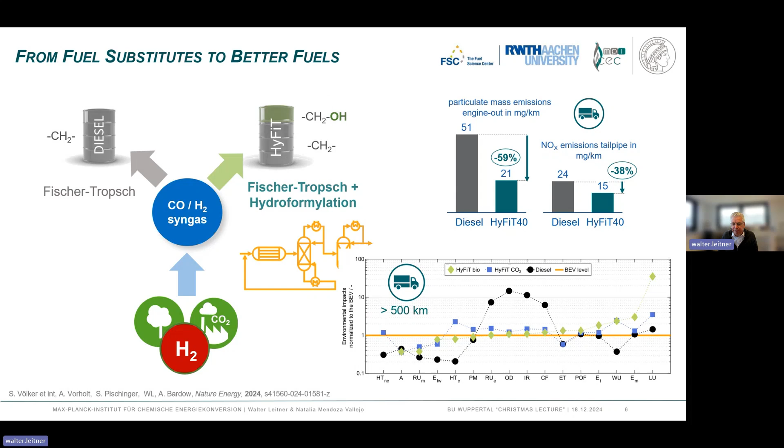Now, the second big molecule that has been discussed already is methanol. Methanol is considered as one of the key targets to link energy and chemistry in the future, because it can be upgraded to a fuel, or it can be used directly as a fuel, in particular in the shipping industry, but it also offers many ways to go into chemical production. And it was advertised by Nobel Prize laureate George Olah in his book Beyond Oil and Gas.

And again, maybe as a historical reminiscence here, Friedrich Asinger at RWTH Aachen, already in the early 80s, wrote a book, Methanol as the Main Chemistry and Energy Raw Material. And again, I have a copy of this book lying on my desk, because he was the predecessor of my chair in Aachen two generations ago, already highlighting the importance of methanol as a potential key link between the energy and the chemistry sectors.

And we see again many projects around the world, not only in Europe. China is very active. Carbon Recycling International, a company that started in Iceland, now is building projects in China. And also China has its own technology that they are developing, still not at the scale of the fossil resource, but maybe that's not even necessary, because maybe the economy of scale works differently in a renewable future because of availability of feedstocks and energy.

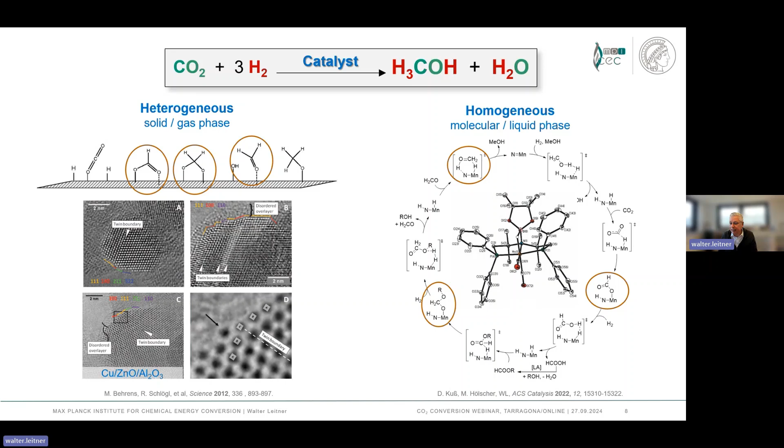And an interesting fact here is that although these are two very different catalysts operating under very different conditions, some of the key intermediates and of the key steps are actually very, very analogous, if not identical. But what we do now is we take this knowledge in order to use hydrogen and CO2 as building blocks in a kind of retrosynthetic analysis.

So nobody on this planet, except for some crazy chemists, wants to have molecules and wants to make molecules. We want to have services and functions. So people need function that is delivered by the chemicals that we made, as coatings, as fragrances, as solvents, as agrochemicals to ensure nutrition, and of course also as fuels, as materials.

So what we do is, we as chemists are the only group in the world that can connect the function with the molecular structure, and then go back and say, if we know these are the molecular functions that we want, how can we make them starting from CO2 and hydrogen in the beginning? And in all these structures, the green comes from CO2, the red comes from the hydrogen. And these are some reactions that have been discovered. Some of them are older, but some of them have been discovered in the last 10 to 15 years.

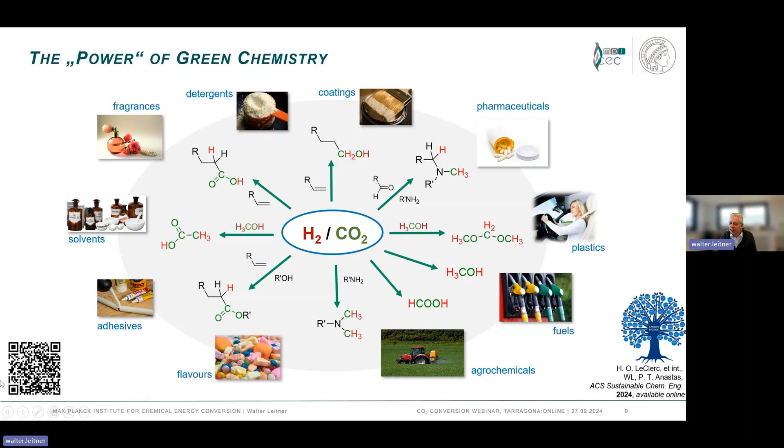And recently, together with Paul Anastas and Julie Zimmerman at Yale University, we've kind of suggested that based on CO2, you can also come up with a tree, like the petrochemical tree, to make all these kinds of products. And the QR code here leads you directly to this paper.

So with this, I would like to conclude already, to catch up a little bit with the time that we have. Yes, we have this knowledge, we can do that. And now it's time to bring this into the market. And the drivers are, of course, the technologies that are already mature, like Fischer-Tropsch and methanol. But then we can think ahead and say, okay, this is how we shape a sustainable future by not just doing exactly the same as today on the basis of renewables, but that we can do better than we did in the past.

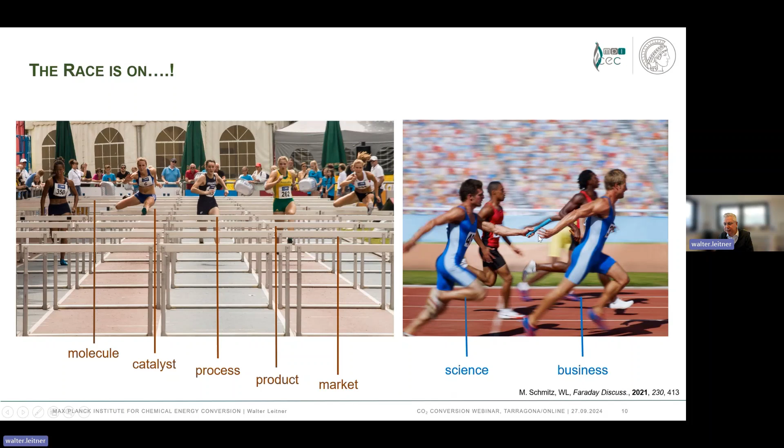And to hand over the knowledge from science to business, it's also important to think about the potential here for startup companies, because for the first time in a long history, there is a good case for creating a startup company in a niche and then growing in the chemical business, which on the petrochemical side was almost impossible due to the requirements of the economy of scale. Now there is a new world ahead of us.

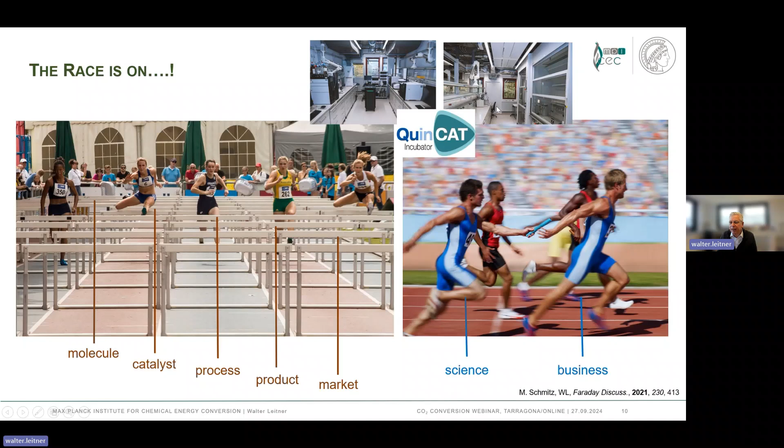And so we are also supporting startup companies with an infrastructure located in Aachen in collaboration with our Max Planck Institute, following the motto of the Max Planck Society, insight must precede application, which does not mean we can only do things that we understand, but means that we should think ahead and have ideas and then bring them into application. And for those who are starting in this realm in their startup business or do research, I like to remind you of Nelson Mandela's quote, "It always seems impossible until it's done."

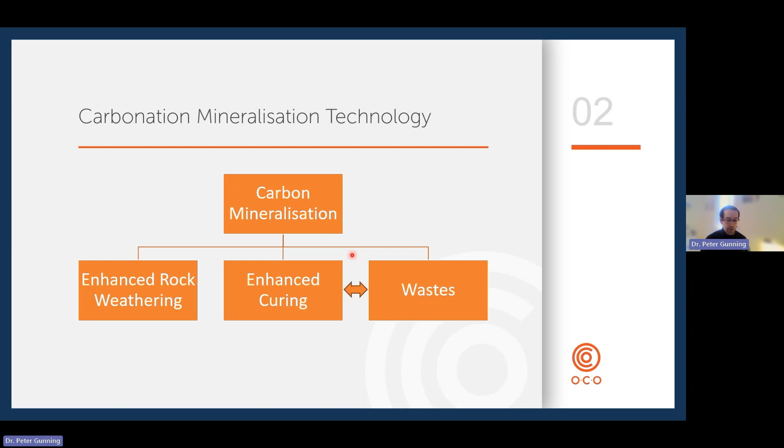If we try and break that down in a bit more detail, there's two basic methods that can be used to achieve mineralization. In situ mineralization is where you effectively have a single step in achieving the conversion of CO2 into carbonates. So this is where CO2 is dissolved into water, and it's pumped underground into a reactive rock formation, and the CO2 reacts with the mineral to form carbonate. Ex situ is where the process happens above ground. So in the case of rock, it will be mined, crushed and processed, and then combined with CO2. Ex situ also applies to the use of waste and construction materials as well.

In terms of the reaction itself, this can either be direct or indirect. Direct will be where the CO2 gas interfaces with the reactive medium without an intermediate step. So CO2 is contacted with the reactive material in the presence of water, and the CO2 is converted into carbonate. An indirect process is whereby the reactive element is extracted from the material first, maybe with an acid, for example, and then is combined with the CO2.

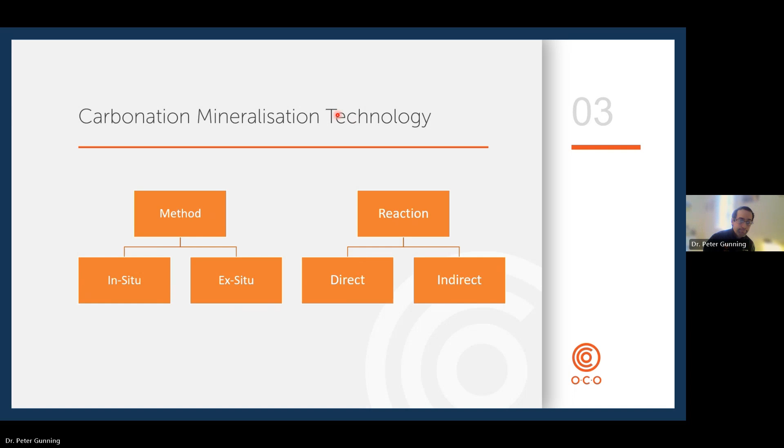So first of all, we want to take a look at mineralization in wastes. It's a delightfully simple concept. You take a reactive waste, something that contains reactive calcium or reactive magnesium, and many wastes arising from thermal processes. So these would be cement, steel manufacture, energy from waste, anything that generally involves heat. It has the potential to produce a reactive waste material through calcination. So it's being heated, the CO2 present is being liberated, leaving behind a reactive material that we can harness. So we add water and we add some carbon dioxide, and we can put that CO2 back into that material.

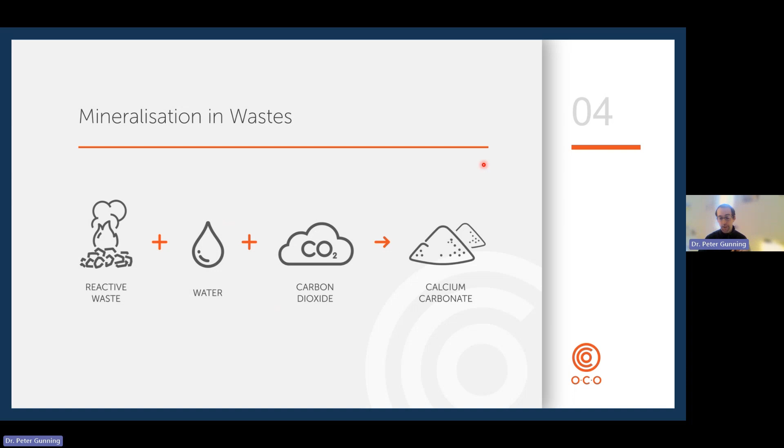I'd like to talk a little bit about some of the positives and the challenges involved in doing that. So I've mentioned that wastes are often very highly reactive. Some wastes can combine with up to 30% of their own weight in carbon dioxide. The beauty of this also is that very often they don't require any pre-processing. They're often fine-grained materials, so they are naturally in a very highly reactive form.

Also, in terms of the carbon capture, generally speaking, the baseline is virtually zero. These materials will often be sent to landfill, so they're going to be sealed up in the geosphere with very little interaction with the atmosphere. So there may be some very long-term weathering of those materials and removals associated, but in our lifetime, the 100-year horizon that's often talked about in terms of carbon removals, very little is going to happen. So it means that any carbon that is captured using this technique is totally additional.

There's also the ability to valorize these materials as new products as well. So by diverting them away from landfill, treating them, we can then produce new construction products, which also has the double benefit of saving natural resources. Of course, there's some challenges involved in doing this. One of the big ones, and was mentioned earlier on, is regulation. Now, regulation is obviously there for a good reason, particularly when we talk about construction materials. But it can sometimes be quite difficult to navigate your way through the various pieces of regulation that exist.

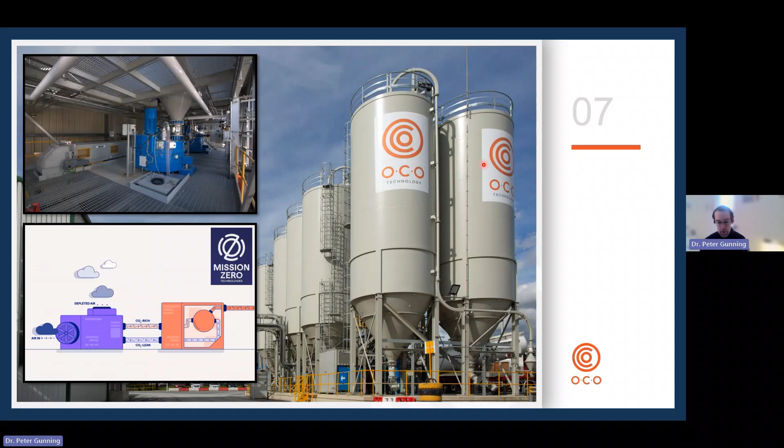In terms of capacity, we process around about 200,000 tonnes of waste per year. And in terms of our carbon capture ability, that's anywhere between 20 and 30,000 tonnes per year.

This is what the process looks like. So effectively, if we start from the top left, we start off with a fine-grained reactive waste material that's brought to our facility by truck. And each site will process typically between 5 and 10 different materials from different sources. So we blend those materials together, so we can try and even out those potential variations in the waste.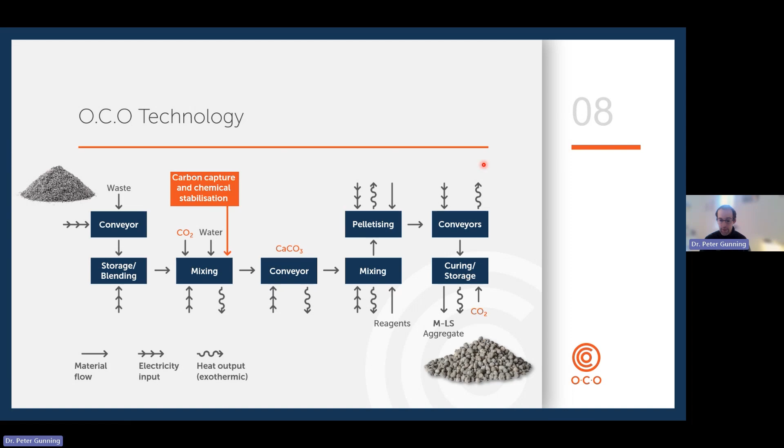That material is then treated with water and carbon dioxide. In a second step, additional reagents are added, and then the mixture is put through a pelletizing drum to form a rounded aggregate that you can see in the bottom right.

This just shows you some photographs of a pilot project that we have together with our partners in Japan, Kobelco Eco Solutions. And the beauty of this system is it can be directly coupled to a flue stack. So we can take low purity CO2 and use it directly in our process with minimal gas processing. Typically, we're operating at concentrations of sub 10% here.

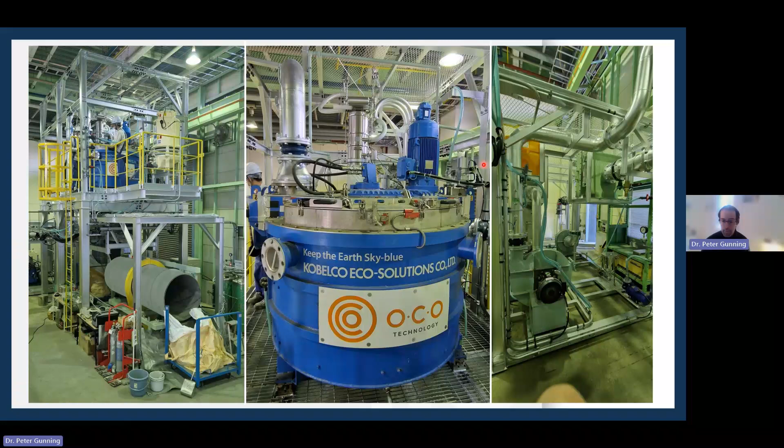In terms of global activity, we've got a number of projects in Europe, Australia, United States, and of course Japan, together with Kobelco. But the one I really want to highlight today, and I know that a number of people who are collaborating on this project are in the audience, is our project together with Repsol in Bilbao in Spain. So together we formed a joint venture company called Biscay Eco Aggregates, or BIA.

And we are building a facility that's due to become operational hopefully early part of next year. So construction has begun, and that will be taking residues from the local area in northern Spain, treating them with CO2 and producing an eco aggregate.

The next technology I'd like to talk a bit about is enhanced curing, or capture of CO2 in construction materials. And I think the positives definitely outweigh the challenges on this one, because it's relatively easy to retrofit this technology. There's huge market potential, and there's a double benefit: as well as using CO2, there is also the potential with many of these technologies to reduce cement usage. So there's a double benefit.

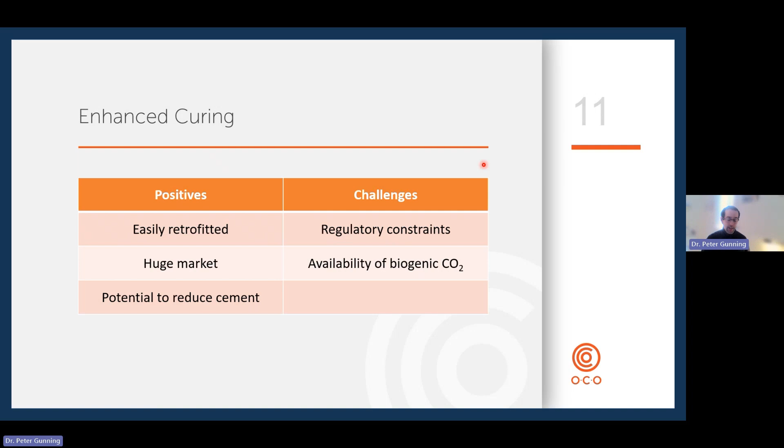In terms of challenges, yes, of course, there could be regulatory constraints, particularly if we are trying to use waste materials in the process. And again, we've obviously got to consider the availability of biogenic CO2. The first example I'd just like to talk about is CarbonCure. Now, they're extremely successful. They have hundreds of facilities operational in America, and they've now started to make inroads into Europe as well, and they may well be active elsewhere.

So their process basically is they retrofit a carbon dioxide dosing system to existing concrete plants. Essentially their technology involves dosing a measured amount of carbon dioxide into the mixing vessel as the concrete is being produced. The CO2 reacts with the cement, which is reactive with CO2, and forms tiny particles of limestone. This helps to enhance the strength of the cement, which means that the cement content can then be reduced. So there's a double benefit. The CO2 is captured in the concrete and the cement content can be lowered and still achieve the required strength performance.

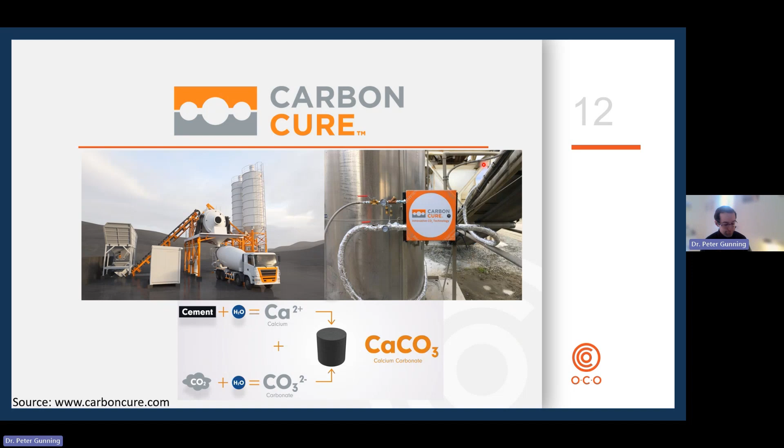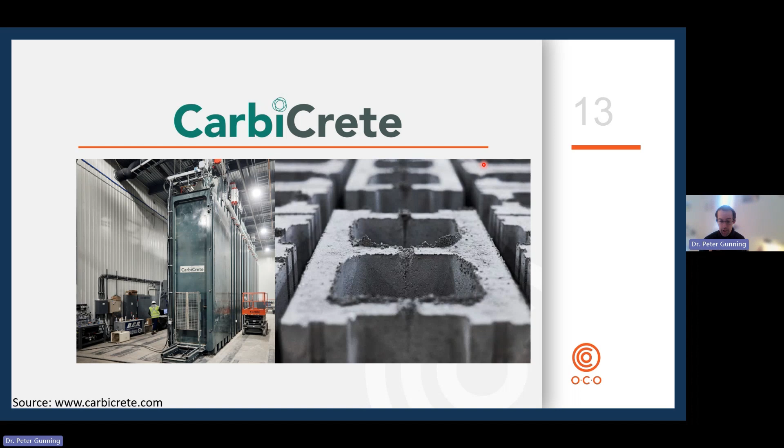Another good example is CarbiCrete. So CarbiCrete are essentially producing masonry units, blocks, but instead of using cement, they are using steel slag. So instantly, huge reduction in the carbon footprint of producing these units. But then the units are cured in a pressurized vessel containing CO2, and the CO2 reacts with the slag to form a carbonate cement that binds it together. So achieving the same performance as a conventional concrete block, but with a carbon neutral, almost carbon negative footprint. Other organisations using a similar process include Concreate or Orbix with their Carbstone products, very much the same, using slag cements and CO2 to produce carbonate cements.

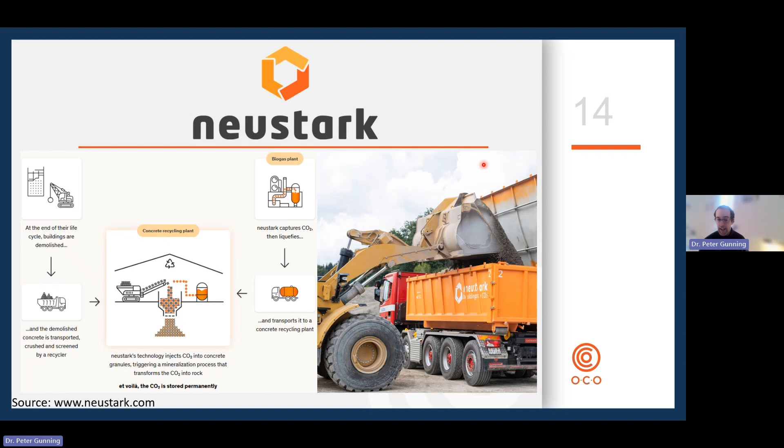Neustark are another good example, who are making a lot of impact in Europe in particular. So their model is to take construction and demolition wastes. When a building reaches end of life, it's demolished. The building is broken up, crushed into small particles, and typically reused. If it's made from concrete, concrete of course contains cement, which is highly reactive with CO2. So their model is to take the construction and demolition waste, add CO2 to it, and produce a carbonated aggregate product that can then go back into the supply chain.

Moving on from construction materials, we'll have a look at enhanced weathering. So again, this is one that is gaining a lot of traction around the world. Essentially it involves taking volcanic rock and scattering it on agricultural land. This material will naturally react with CO2. So materials like olivine or basalt, magnesium silicates, calcium silicates will readily react with CO2 in the atmosphere, but of course it's a relatively slow process on a geological timescale.

So by helping Mother Nature, by taking the material and crushing it into fine particles, we're essentially accelerating that reaction. As water falls from the atmosphere, it's absorbing CO2, that's contacting the fine-grained material that's been spread on the ground and turning it into carbonate. Ultimately, that carbonate is washed into the oceans, where it's said it can also help with acidification.

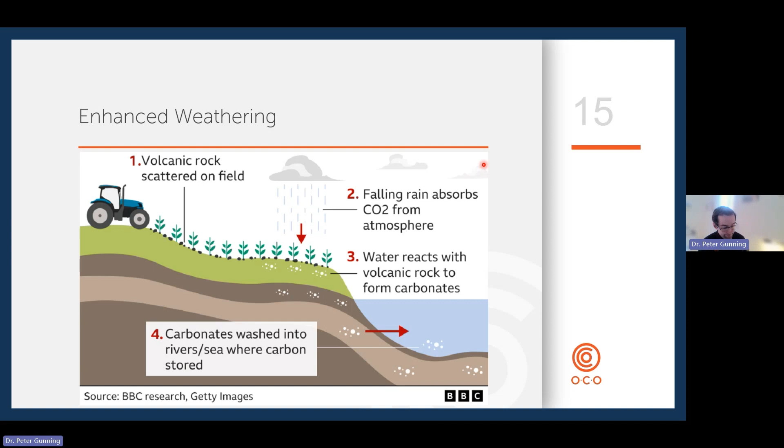Positives and challenges associated with this: well, the removal potential is enormous. There's also widespread deposits of these materials around the globe, and they can have huge reactive capacity. I mentioned olivine, which is really the rising star, can react in a 1-to-1 ratio with CO2, so that's its own weight in carbon dioxide. And the material can also enhance soil properties, so it can act as a natural fertilizer.

Challenges, of course: the material isn't in a form that can be readily converted. So the first thing we need to do is pulverize the rocks into a relatively fine powder. And there's obviously things to consider there in terms of potential impacts of extraction and scaling up that extraction. We also need to consider the compatibility of the rock type with the soil chemistry.

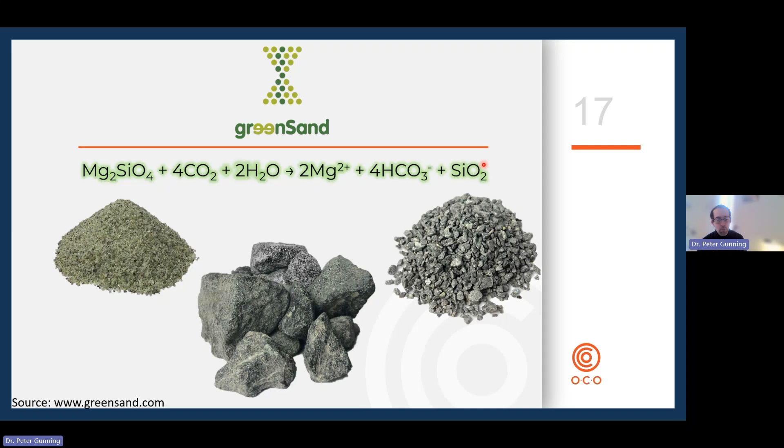So the first example I'd like to talk about is Greensand, and their concept is delightfully simple. Basically, they are promoting the use of olivine, which is a magnesium silicate rock, and essentially they are just saying, why not use olivine in place of other materials, particularly for decorative purposes, for pathways or gardens. It's quite a pretty looking material, with that nice greenish color to it. So by getting people to use more and more of this and spreading it around, it's just acting as carbon sinks.

The next one I'd like to talk about is Heirloom. Now, I came across this a few days ago, and I was kind of captivated by this concept. So essentially, they are taking limestone, crushing it into a fine powder, and then heating it in an electric kiln powered by renewable energy. By doing that, they calcine it, so they liberate the CO2, leaving behind calcium oxide.

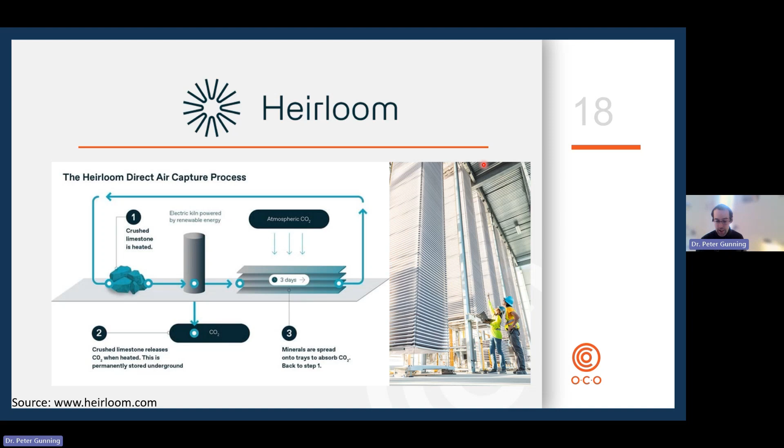That is spread out on hundreds, if not thousands, of metal trays that you can see in the photograph on the right. And that is just allowed to naturally absorb carbon dioxide, converting the calcium oxide back into calcium carbonate. That material then goes back into the kiln, is heated up, the CO2 is released, the CO2 is captured, and then it is permanently stored underground. And the process just keeps on going round and round as a cycle.

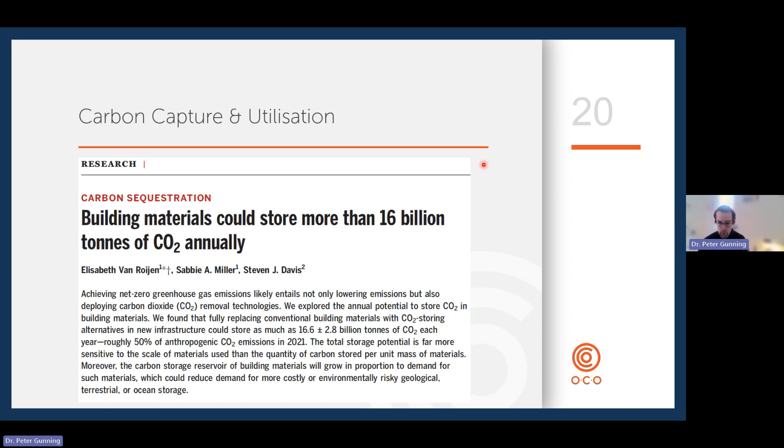And that figure is taken from an article that was recently published in Science magazine, and I was asked to review it on behalf of New Scientist. So I do encourage you to go and have a look at this. But yes, based upon looking at the arisings of industrial waste around the globe, the potential is enormous.